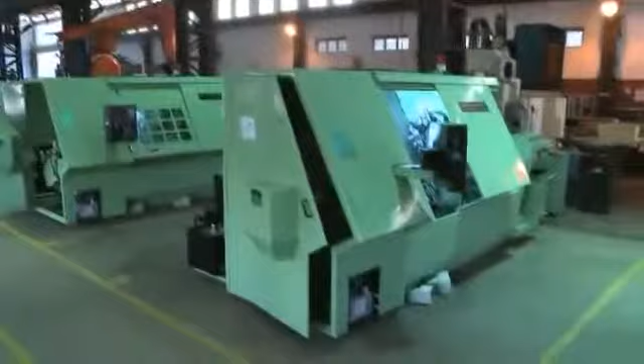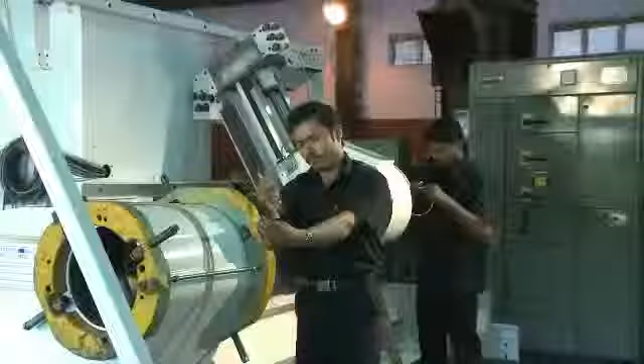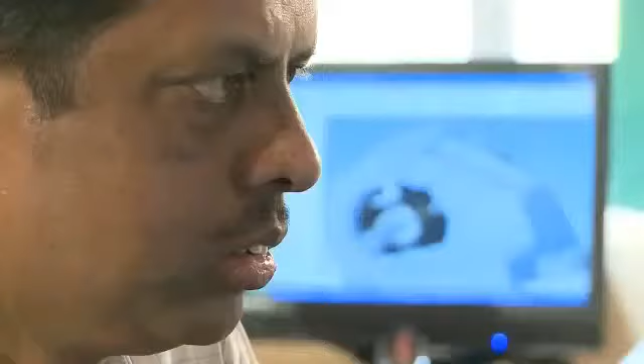Prior to using Solid Edge, we did a lot of manual work. The error rate was significant, and the time taken for design and developmental work was very high. So we thought of going for Solid Edge.

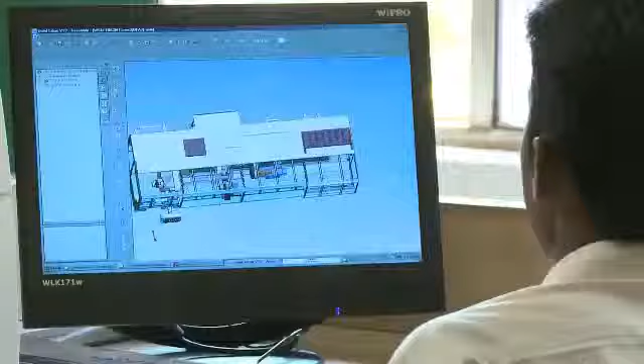We evaluated various CAD software and found Solid Edge with synchronous technology to be the most efficient. It has the functionality to import 2D drawings and make changes to designs much faster and quicker. A person from the manufacturing unit can understand and visualize the designs much better from the 3D drawings. It's because of all these features that we decided on Solid Edge for our company.

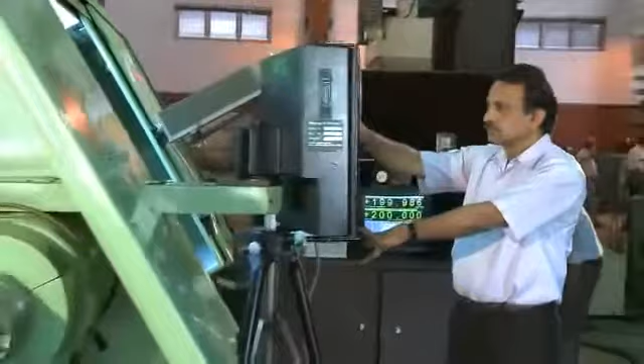In any machine tool industry, there are a lot of things which don't necessarily follow a set pattern, and we require corrections. For helping us in this direction, the software from Solid Edge has helped us a lot. In the 3D mode, we are able to understand the pros and cons, and the clearances, so the unnecessary time wasted in correction is eliminated, which is very huge.

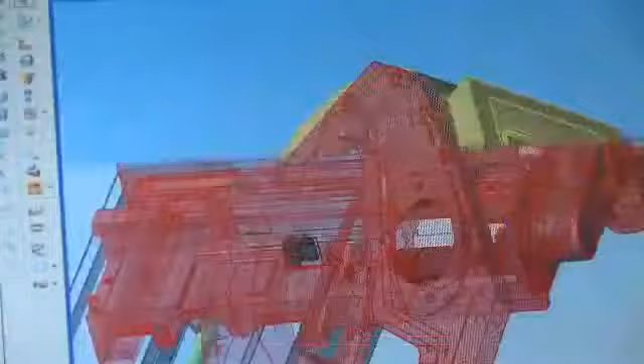Using Solid Edge synchronous technology, it's very easy to create 3D models. It facilitates quick updates in the designs and allows history-free modeling, reducing the limitations faced by the designer. All these features make design concepts clear to the entire team.

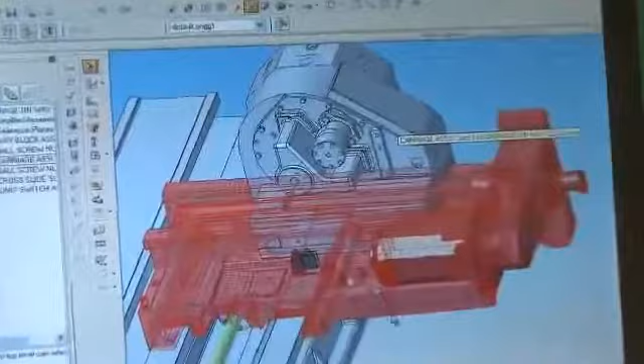Using synchronous technology, we have reduced design cycle time by 50 to 60%. In our company, around 80% of the designs are now being done using Solid Edge synchronous technology, and the remaining 20% are being done using other 2D CAD software.

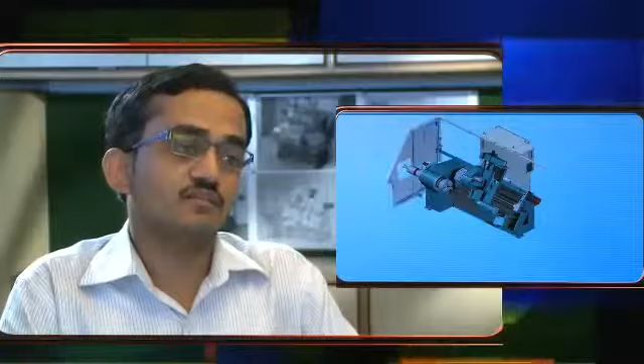It's very easy to design and simulate the working of in-place assembly parts like way-block carriage, tailstock, steady rest movement, and other components of a CNC turning machine. Our designers are also very confident to communicate with our customers about their requirements and concepts.

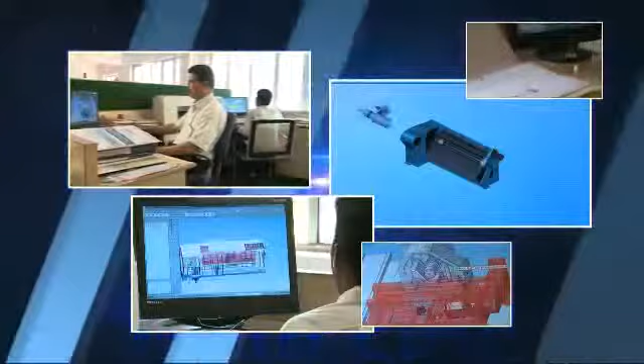Synchronous technology has made component editing much faster. If a customer provides us with a 3D model, we can do modification in the design and send it back to the customer for approval. Instant modification makes the designing process much faster.

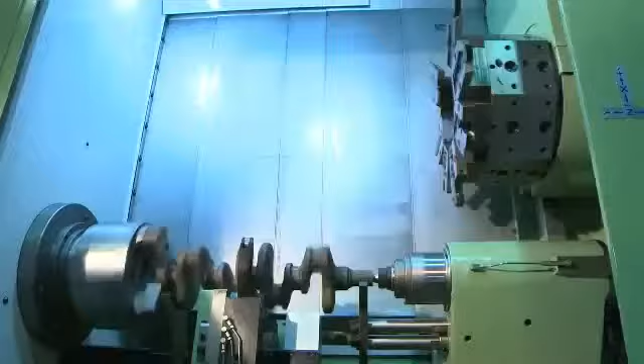I'll definitely recommend Solid Edge synchronous technology to all our suppliers and vendors. It has led to huge savings in terms of time for us in completion of projects due to its faster design capabilities. This software has allowed us to take on more new projects and grow our business further.

Whatever little association we have had with Siemens has been very good, and with Solid Edge also, it has been good. I feel that in the future we'll join hands and see how we take it from there.